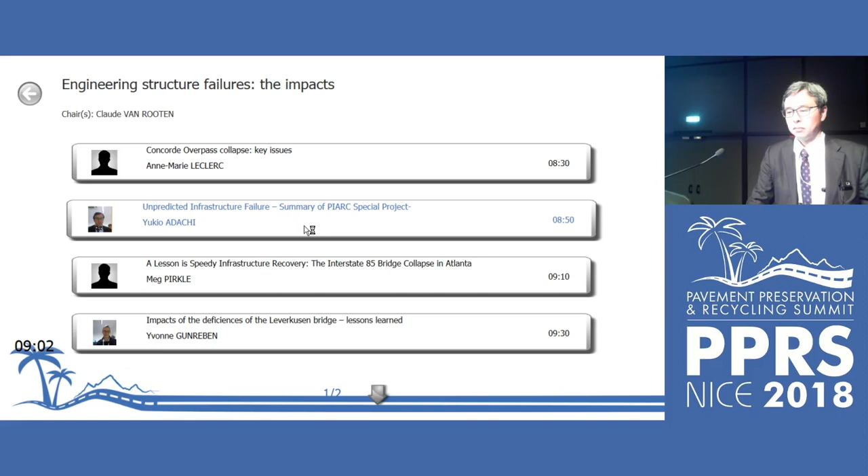Good morning, ladies and gentlemen. My name is Y. Adachi from the Hanshin Expressway, one of the highway companies in Japan. I am also the English-speaking secretary of the TC Technical Committee E3 Disaster Management. I am presenting the summary of the special project. The title of my presentation is Unpredicted Infrastructure Failure. As our president already explained, I will talk about the summary of the PIARC special project.

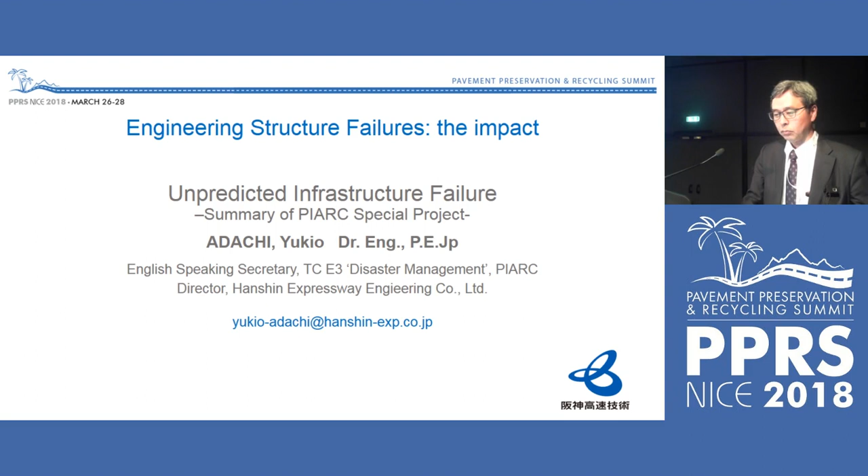I think all of you in this room know what PIARC is. The main role of PIARC is knowledge exchange. PIARC organizes technical committees to play a key role in the dissemination and exchange of technical information during a 4-year cycle period. This is a kind of permanent system.

But under rapid change in the road environment, some emerging issues that need to be urgently discussed outside the TC activities were identified. One of these issues is UIF.

Currently, PIARC defines their UIF like this: UIF is an instance where failure occurs on an asset that is deemed in good condition and is well maintained. Failure here can be defined as a closure or collapse of an asset that leads to loss of service, such as the closure of a bridge.

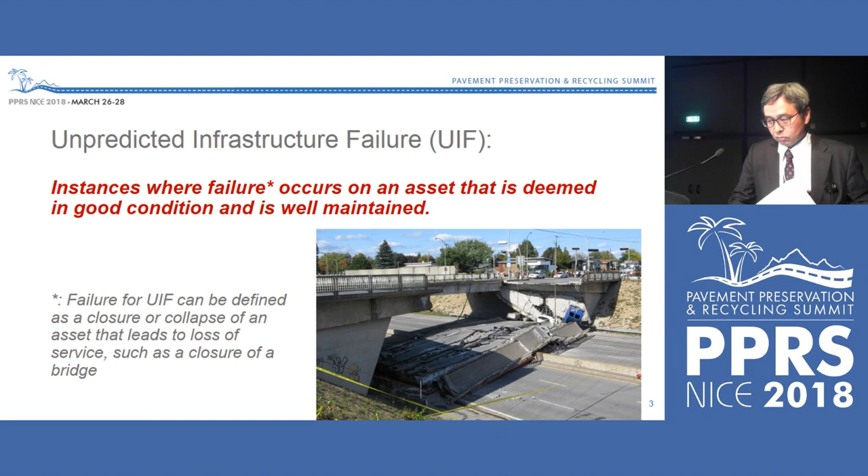In order to investigate the management technique of the UIF, PIARC launched a special project. The purpose of this study is to support road administrators in understanding key learnings which will enhance mitigation and response arrangements for UIFs. This study was supervised by the PIARC Project Observation Team, a joint team of PIARC experts, TCD3 Bridge Engineering, and TCE3 Disaster Management.

The collection of UIF case studies is very important for this project. But the information on UIF is very sensitive if the UIF event has legal issues, so the collected number of UIF case studies is very limited. By using the PIARC network, we collected and carefully selected 15 case studies for further analysis, considering World Bank country classification as well as geographical and structural distributions.

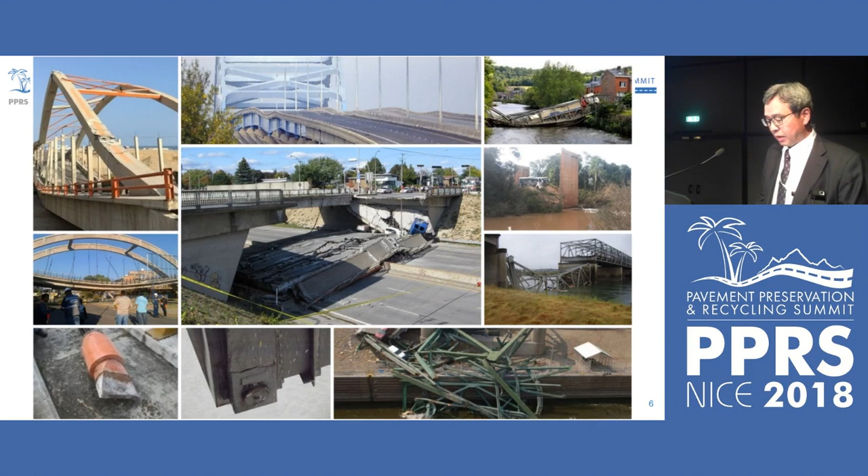These are photos of the UIF case studies. Most of the collected UIF case studies are component failures of bridges. We conducted phone interviews to collect further data, but due to the limitation of interview time, we focused just on the management techniques of the UIFs. The quality of the information greatly depends on the country situation: very limited quality in low-income countries, whereas high quality in high-income countries.

This is a schematic image of the UIF impact and also the UIF recovery. We studied how we can improve this system, or the system resilience against UIF. I think the aim of this UIF management is to enlarge this green area as much as possible.

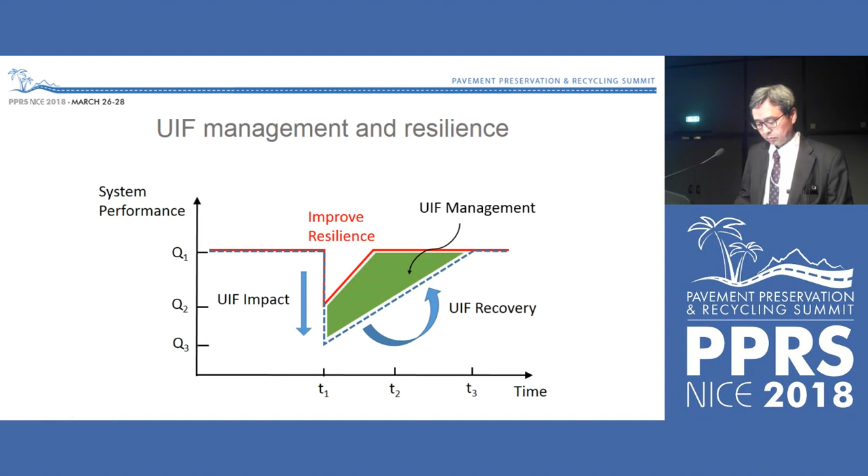We use the incident management concept for analyzing UIF. As you know, incident management is composed of four element processes: mitigation, preparedness, response, and recovery. First of all, we analyze the UIF from the mitigation aspect.

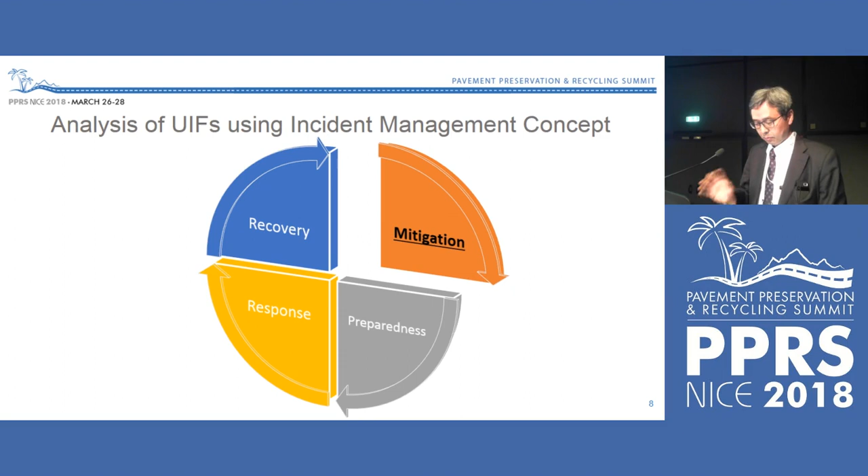The first slide shows the triggers of the UIFs. As you can see from this figure, almost two-thirds of the events are caused by component or component-related failure. This means that these events are related to defects in the design and construction phase, or bad inspection or repair programs of the asset.

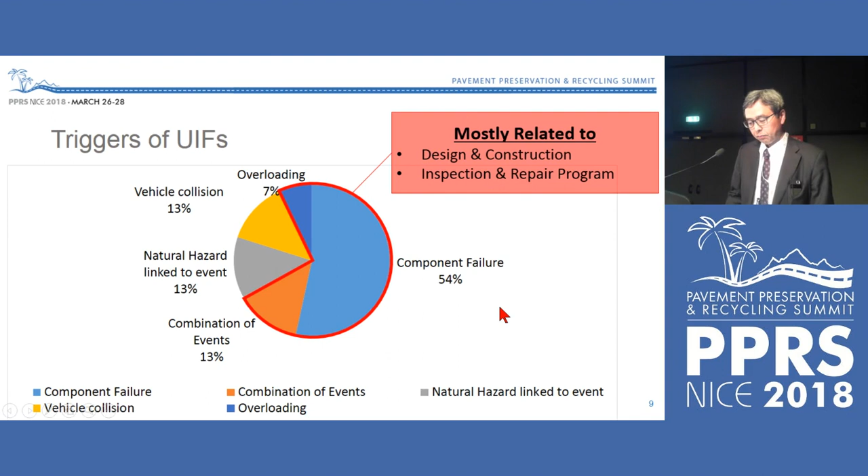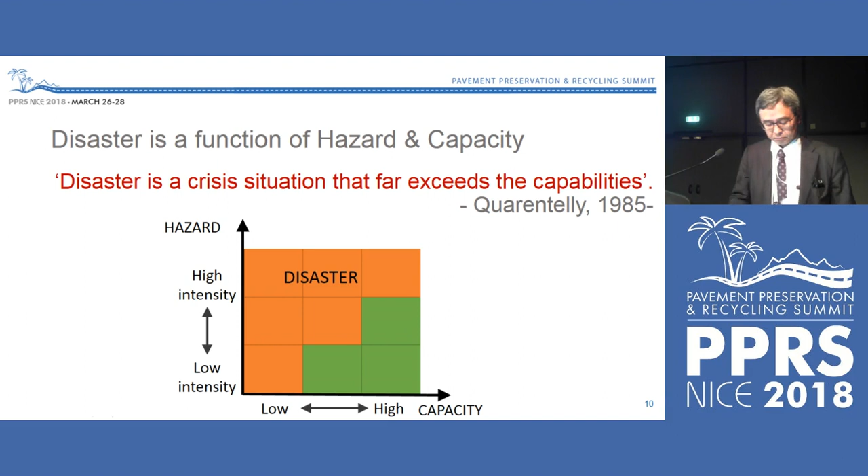Here, I would like to introduce the concept of the maintenance environment. Say we have the incident field, every incident in this green area. Any incident could be prevented or mitigated by good design and construction, or a good inspection and repair program.

I'd like to call this good design and construction and good inspection and repair program the maintenance environment. I think the UIF will occur outside the area of this maintenance environment. If we have a matured or large maintenance environment, all incidents could be prevented or mitigated. Contrary, if we had a poor maintenance environment, meaning a small area of maintenance environment, we will have a lot of UIF events.

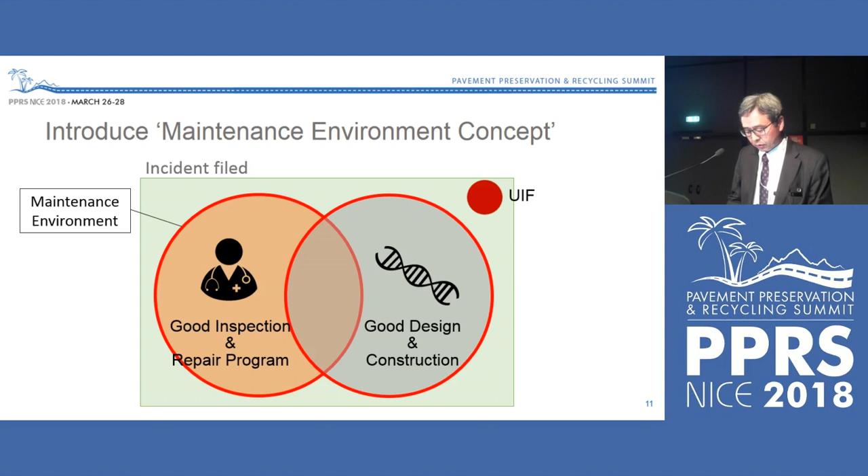Using this idea, we mapped UIF case studies in the maintenance environment field. Here I introduce the maintenance environment plane. The lateral axis shows the infrastructure robustness, and the vertical axis shows the maintenance performance.

The green area shows the society that has a poor maintenance environment. The gray area shows the society that has the minimum maintenance environment. And here shows the society that has a good or matured maintenance environment. We mapped 15 UIF case studies in this figure, and we found that the UIF case studies can be categorized into four fields, or four categories.

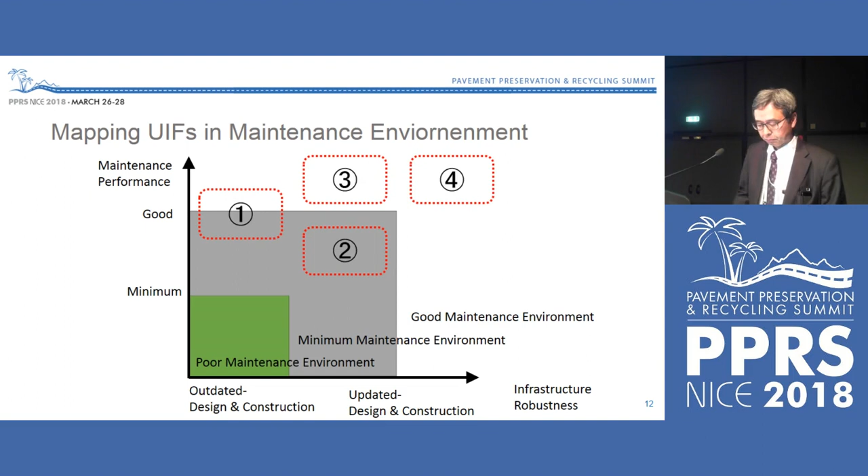Okay, first category is here. Probably this category will travel to any country in the near future. The photo here is a UIF case study contributed by Belgium. A heavy truck tried to pass through this bridge, but the truck was too overweight to pass through, so the UIF occurred.

This is just a direct cause, but there was another huge factor. This bridge was owned by the local government, and due to budget limitations, they did not perform good maintenance on it. After the event, they changed the maintenance management for such smaller assets, adopting the bridge management system for smaller assets. Our infrastructure is getting older and older, so changes in management for such small assets will be very important.

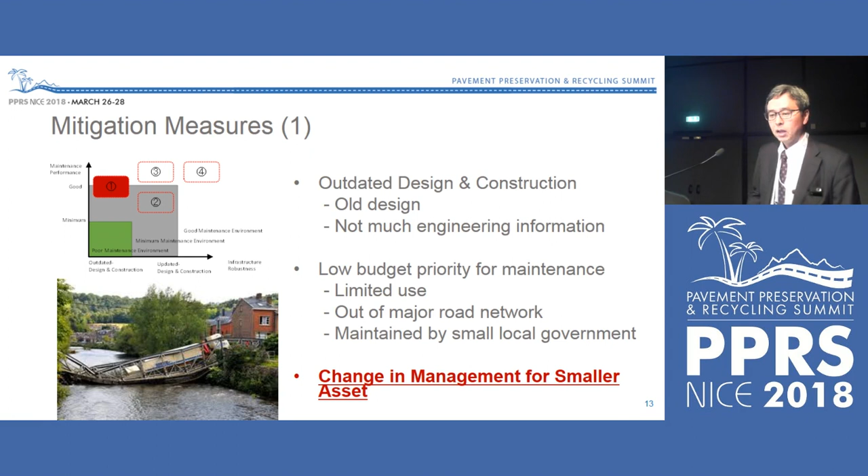Okay, next category is here. The photo here is the UIF case study contributed from Bolivia. In this case study, the slip of the newly invented cable anchor collapsed the bridge due to the lack of sufficient pre-performance testing or load carrying capacity testing.

But this bridge had another factor. The designer and the inspection and maintenance officer were the same person, so there was no real review and no check system was activated. Also, the lack of maintenance protocols could be another factor, because there was no possibility to detect the signs of the UIF.

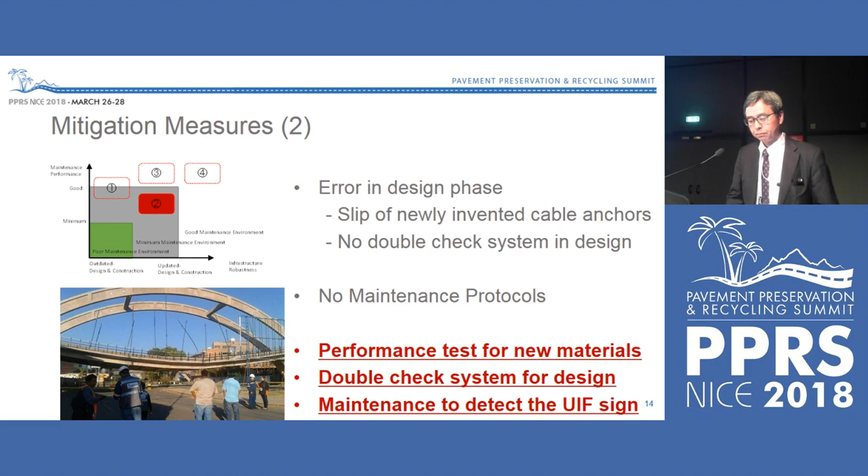Okay, this one is a very well-known UIF. This case was already presented by the former presenter, Ms. Leclerc, so I do not need to present additional information. As she explained, the bridge had a defect in the construction phase, but nobody knew the fact before the event. This bridge was well maintained according to current maintenance engineering practices, so I can say this event was really unforeseen, and this was a really sudden failure.

But there existed an information gap between the patroller's insight and the engineer's judgment. What they improved to prevent this event is that they introduced non-destructive assessment inspection, and also monitoring inspection or daily inspection, for enriching the inspection level.

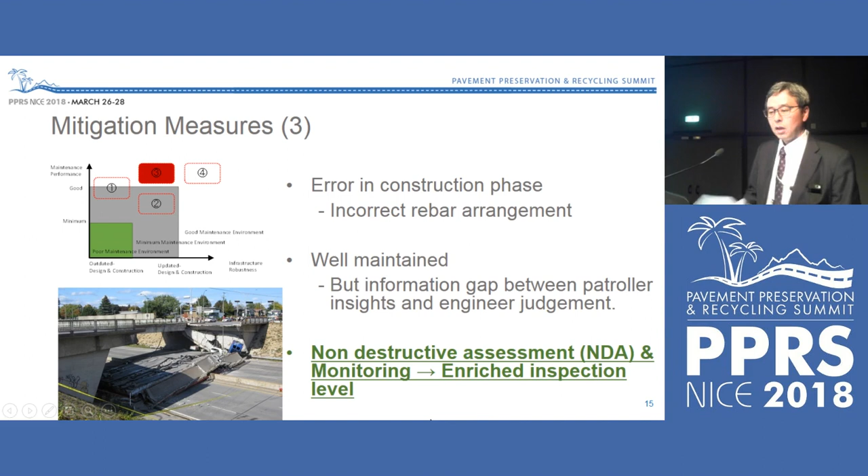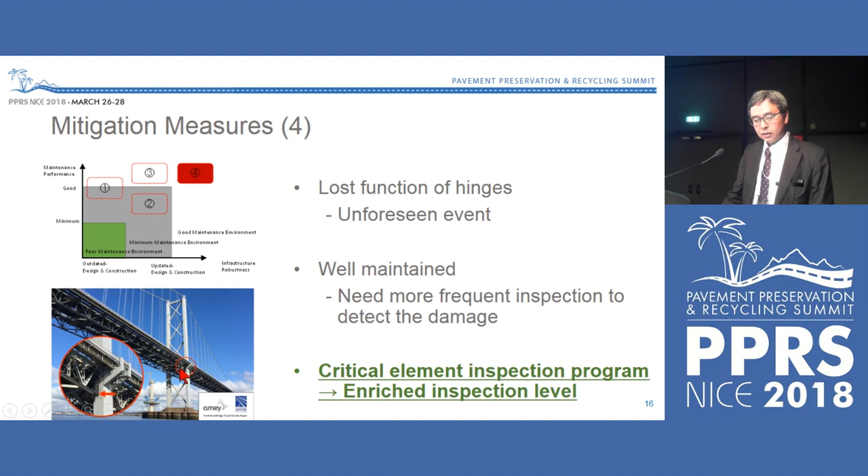Okay, last category. This is also a case of a really unforeseen event. This is the photo of the Forth Road Bridge in Scotland. Here they have an end link, and this end link failed due to stress concentration from the loss of hinge function. This end link is a critical member for the suspended deck.

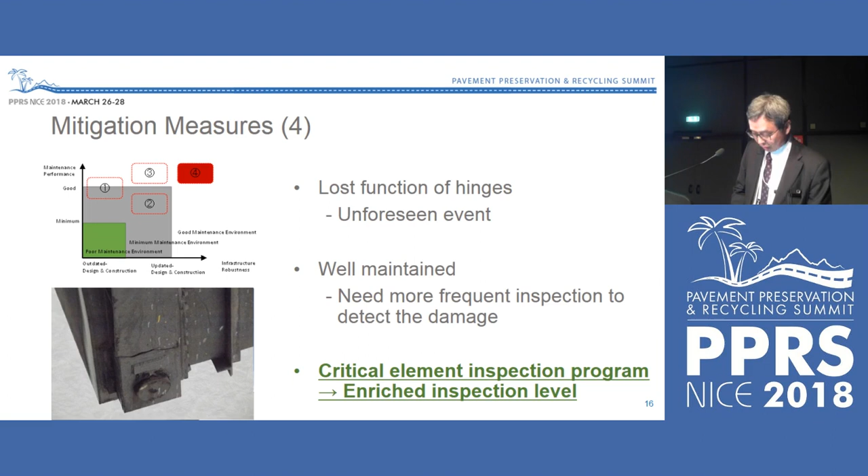This bridge was well maintained with weekly, routine, and periodical inspection. During a routine yearly inspection, the damage was found and the bridge was soon closed for emergency repair. This kind of shear damage propagates very quickly, so they thought they needed more frequent inspection. They introduced a critical element inspection program for critical members, with monitoring, daily, or weekly inspection, to enrich the inspection level as well.

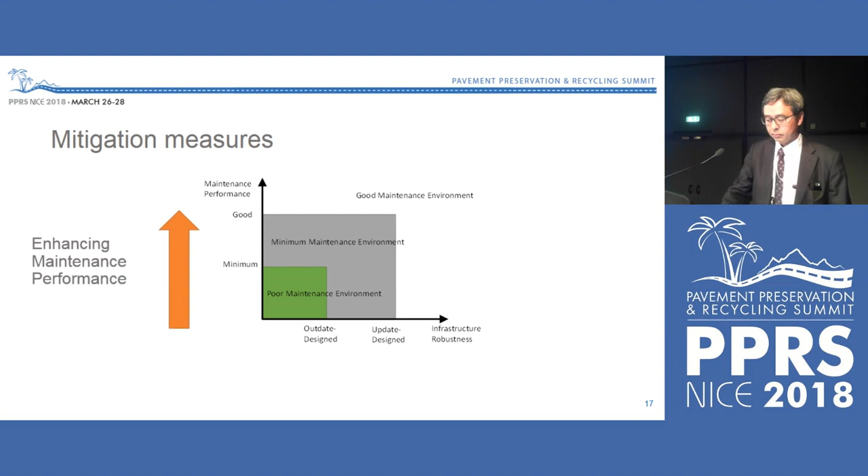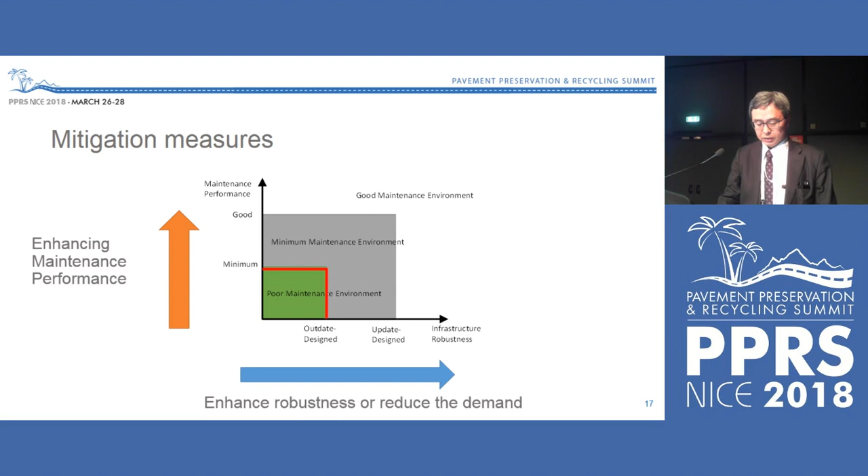Again, I show you the maintenance environment map. Almost all road administrators improved their maintenance environment in some way as a reaction to UIF events. Enhancing the maintenance performance is one idea. Enhancing robustness or reducing demand is also an idea. But I believe that enrichment of the maintenance environment is a key component of the management of UIF.

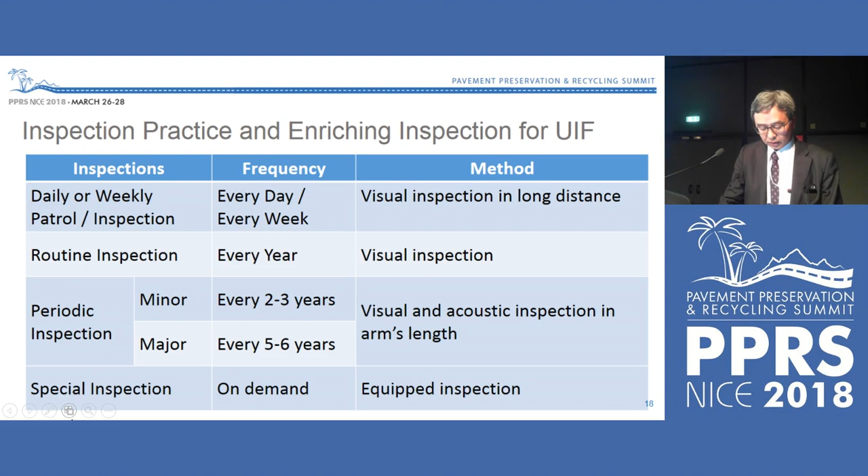This table shows the current practice in inspection of road infrastructure where they have a matured, good maintenance environment. Generally, the matured maintenance environment covers daily or weekly inspection, routine inspection which is yearly inspection, and periodic inspection, plus special inspection. Currently, UIF-experienced countries improve their inspection system by enriching the daily, weekly inspection in order to introduce the monitoring concept in their inspection.

Next phase, next is the preparedness. Yes, look at your watch, please.

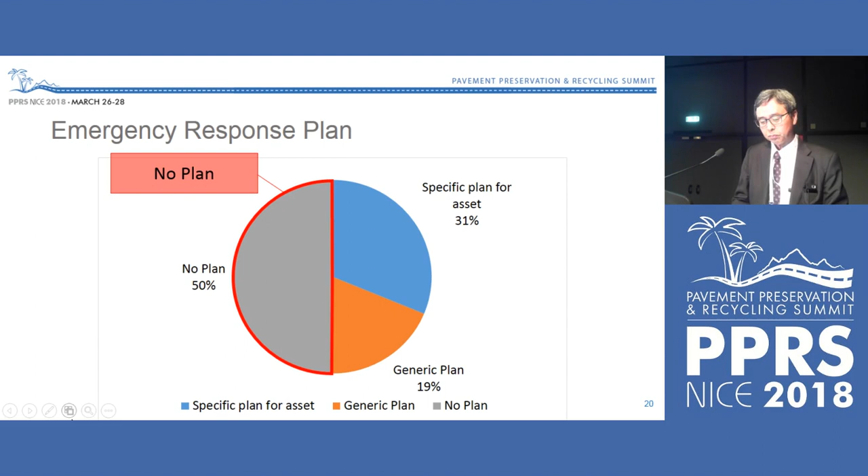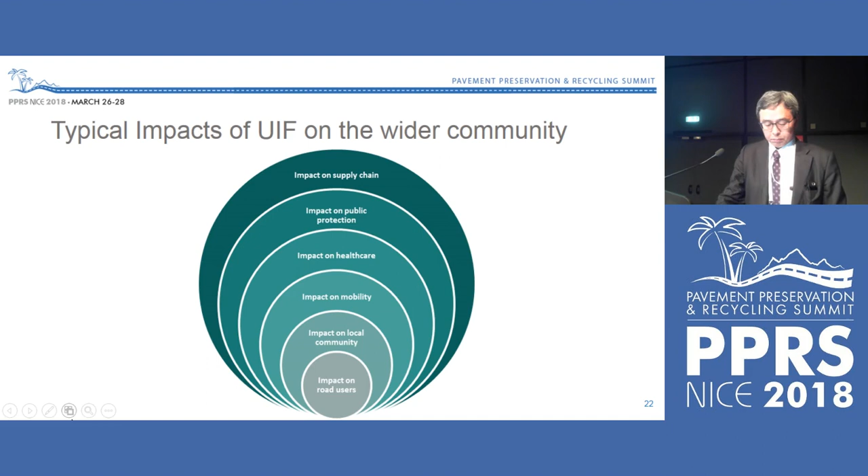Next is the response. The impact of UIF is similar to that of any significant incident that results in loss of infrastructure. The biggest difference between UIF and loss due to a significant incident is the public response to road administrators. If the UIF was not successfully managed, it was perceived to have a negative impact on road administrators. So communication is a key component in the case of UIFs.

Now I show you a good example, a good case study, especially in terms of communication. This is the case of the bridge closure of the Forth Road Bridge. They successfully harnessed any kind of media for communication between the users and the road administrators as much as possible.

These are the words, just as I took them from their homepage. They said feedback was overwhelmingly positive, meaning stakeholders had confidence in the team, and the site workforce in particular became heroes of the situation.

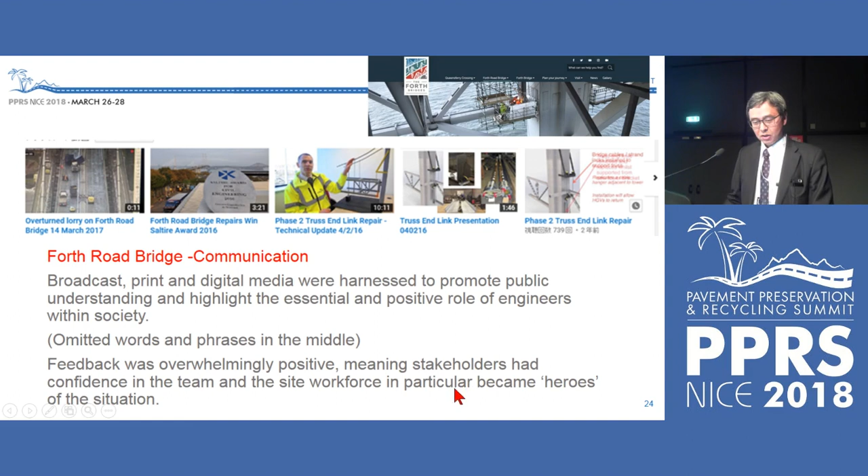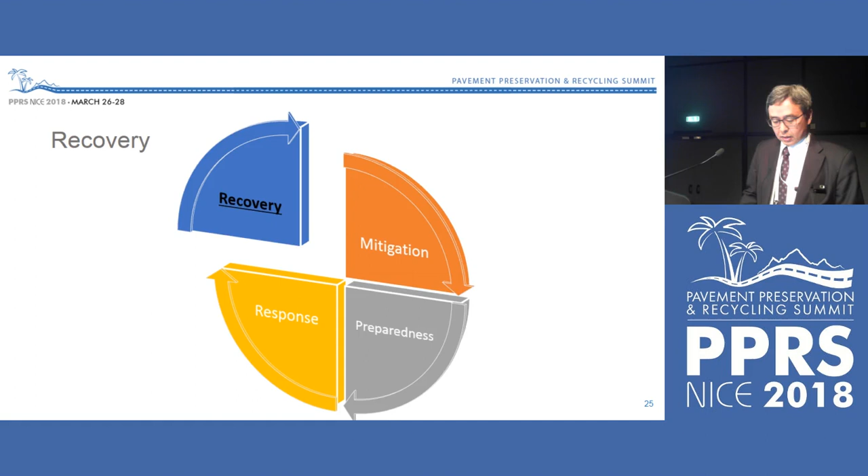And finally, I show you the recovery phase. In the recovery management phase, the wider impact should be considered beyond just the replacement of the asset. So quick recovery is essential in recovery management.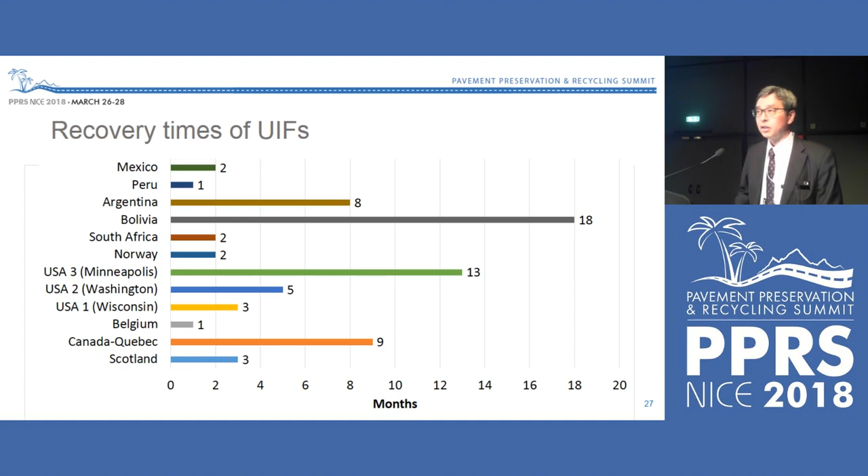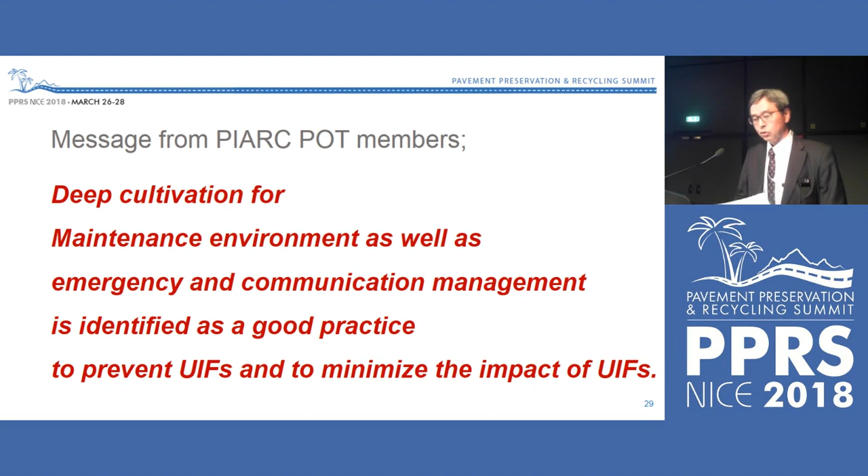Okay, so I'll give you the message from the PIARC POT members. My conclusion is here: deep cultivation for the maintenance environment as well as emergency and communication management is identified as good practice, or I should say essential policy, to prevent UIFs and to minimize the impact of UIFs. Thank you very much.

Thank you very much. I see one question. I will take only one because I see the time running. Here, excuse me.

Excuse me. Now we are talking about UIF. In quality management, there is common cause variation and special cause variation. What's the difference between special cause variation and UIF?